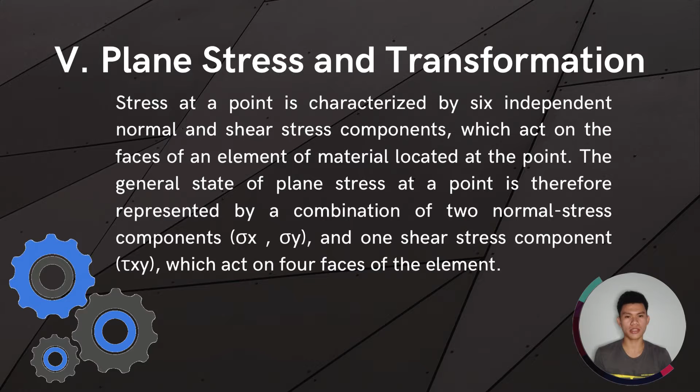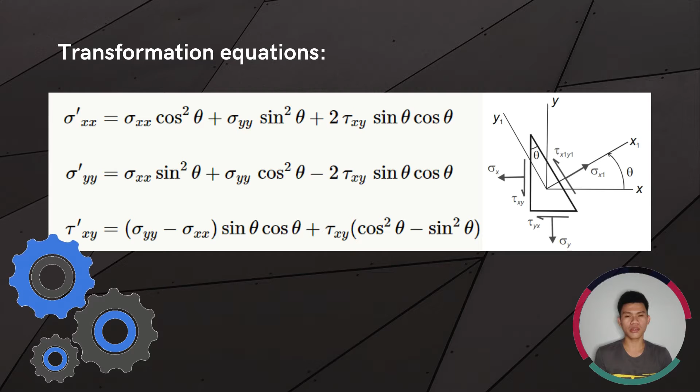So as you can see, this is the plane stress on xy plane and its orientation. And with it, we have obtained these equations. And incorporating these equations, we arrive at these transformation equations, which we're going to be using, particularly in this type of problem. So without further ado, let's get into our problem.

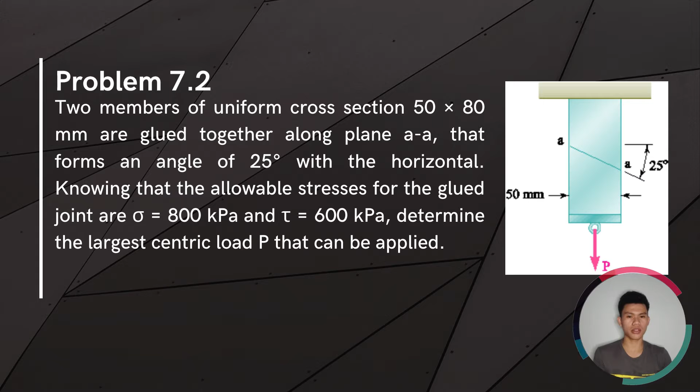We have 2 members of uniform cross-section, 50 by 80 millimeters, glued together along plane A-A that forms an angle of 25 degrees with the horizontal. Knowing that the allowable stresses for the glued joint are 800 kPa for the normal stress and 600 kPa for the shear stress, determine the largest centric load P that can be applied.

So first thing is to create a free body diagram for us to further understand the problem. We have our plane stress on xy plane as shown, and since the glued plane A-A forms an angle of 25 degrees from the horizontal, we have this orientation that indicates our normal and shear stress. Then taking the angle perpendicular to the incline by subtracting 25 degrees from 90 degrees, we obtain the angle theta of 65 degrees.

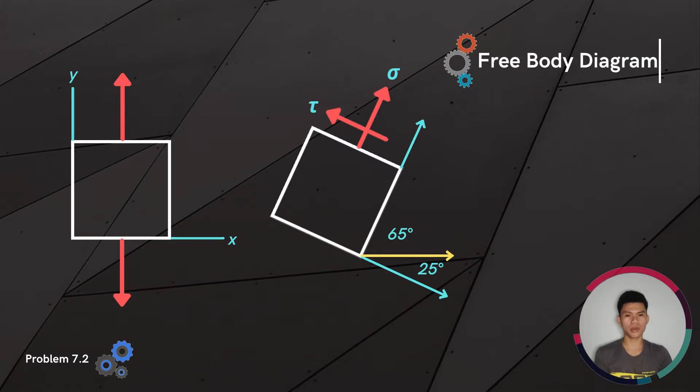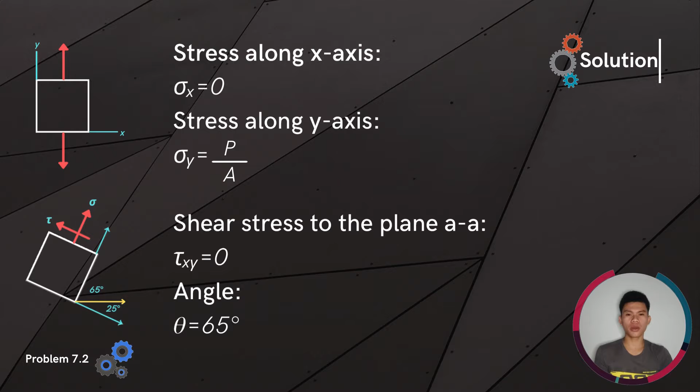Since the pressure in this member only acts downward, the stress along x-axis will be equal to 0. The stress along y-axis is equal to pressure over area. The shearing stress will also be equal to 0, and our angle is equal to 65 degrees. So since we are going to find P, we will use the transformation equations shown earlier.

We have the normal stress of the plane equal to the stress along x cosine squared theta plus stress along y sine squared theta plus 2 times shear stress sine theta cosine theta. And since the stress along x and shearing stress are both equal to 0, we are left with the stress equal to stress along y, which is pressure over the area, times sine squared of 65 degrees. Then derive P using this equation. So we can now get P equal to the area times the normal stress over sine squared 65.

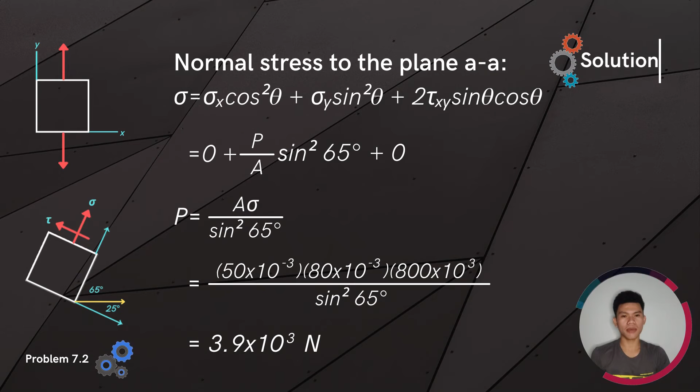Now let's substitute the given values considering its units. Like for the area, since the given was in millimeters, we need to convert it to meters, as well as the stress given from kilopascal to pascal. So we now got P of 3.9 times 10 to the power of 3 newtons.

Then let's also use the shear stress equation in getting P. We have shear stress equal to the quantity of stress along x minus stress along y, sine theta cosine theta, plus shear stress multiplied by the quantity of cosine squared theta minus sine squared theta. And again, since stress along x and shear stress are 0, we are left with shear stress equal to positive stress along y-axis, which is the P over area, times sine 65 degrees and cosine 65 degrees.

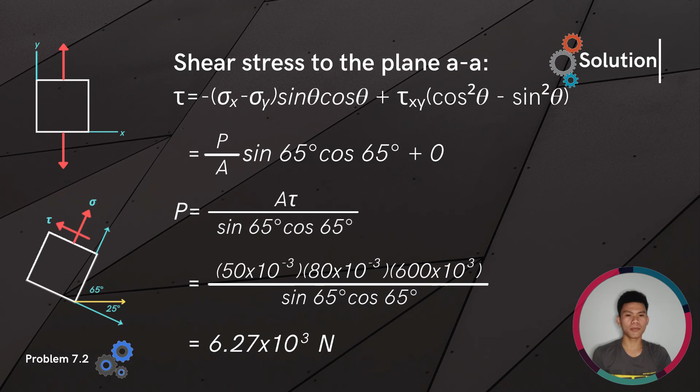So derive P from the equation, then we have P equal to the area times shear stress divided by sine 65 and cosine 65. By substituting the given values considering its units, we get P of 6.27 times 10 to the power of 3 newtons.

And since the allowable value of P is the smaller of the 2 load values obtained, our P is equal to 3.9 times 10 to the power of 3 newtons, or just 3.9 kilonewtons. So that's pretty much it.